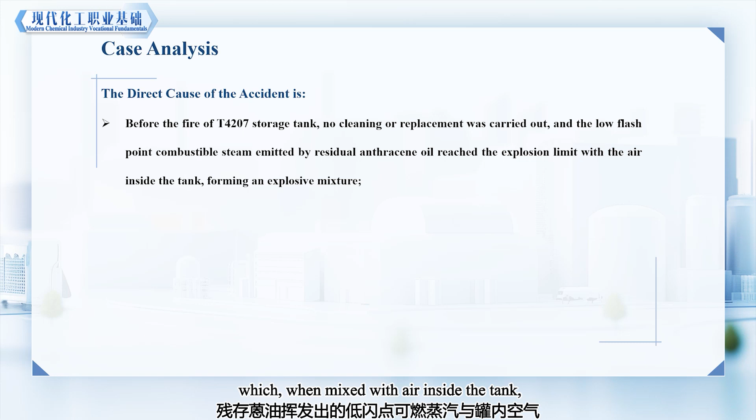The direct cause of the accident, as investigated, was that the storage tank was not cleaned or purged before hot work, and the remaining anthracene oil evaporated into low flash point flammable vapors, which, when mixed with air inside the tank, reached the explosive limit, forming an explosive mixture.

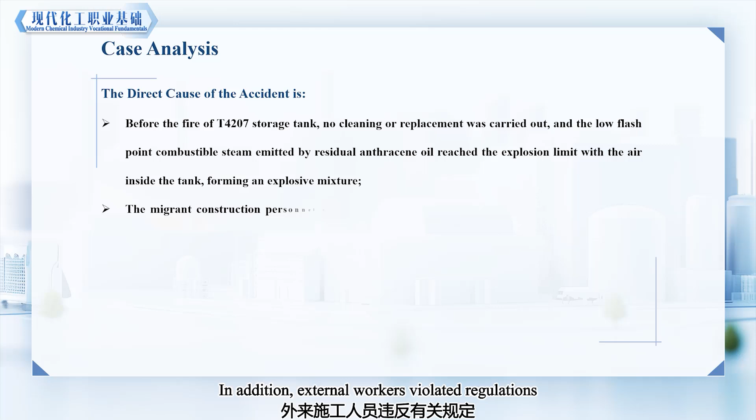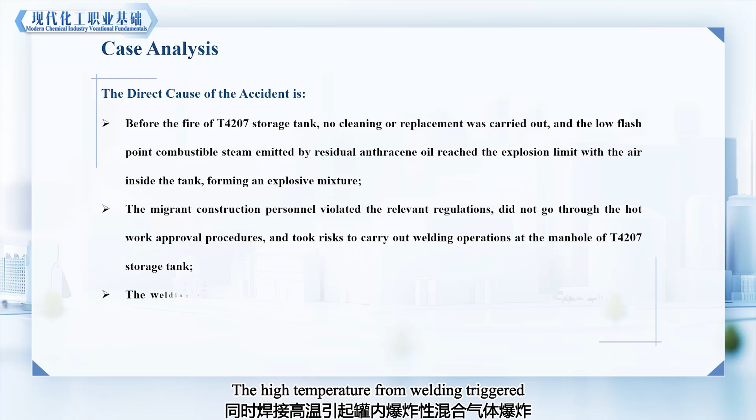In addition, external workers violated regulations by not obtaining approval for hot work operations and recklessly welding on the T4207 storage tank manhole. The high temperature from welding triggered the explosion of explosive gases inside the tank, causing damage to the tank and a fire as the materials inside were released.

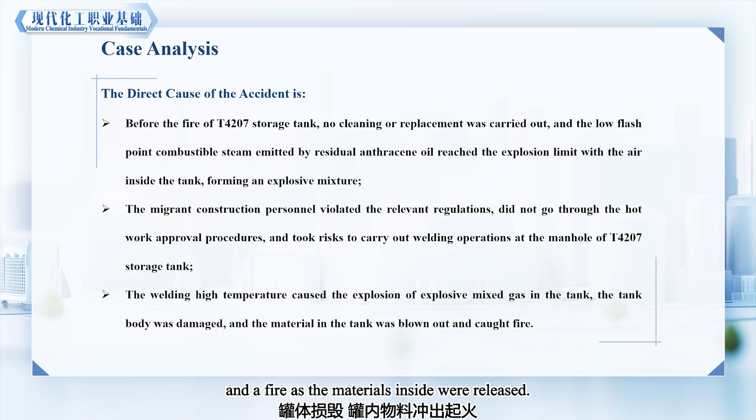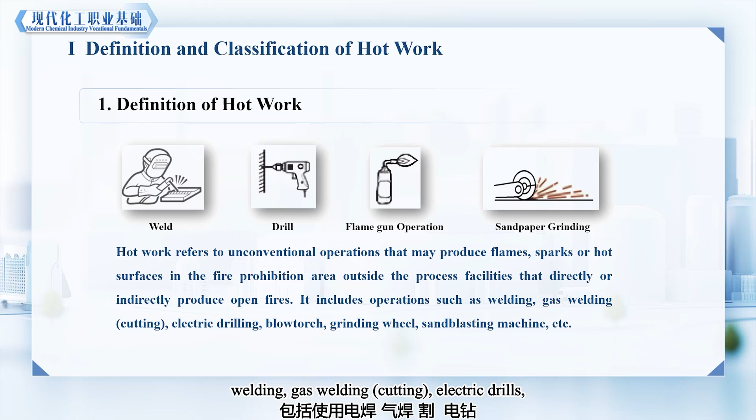What is hot work? What are the safety management requirements for hot work operations? Let's take a look. Hot work refers to unconventional operations that may produce flames, sparks, or hot surfaces in fire-restricted areas, either directly or indirectly generating open flames. These include operations such as welding, gas welding, cutting, electric drills, blowtorches, grinders, sandblasters, and more.

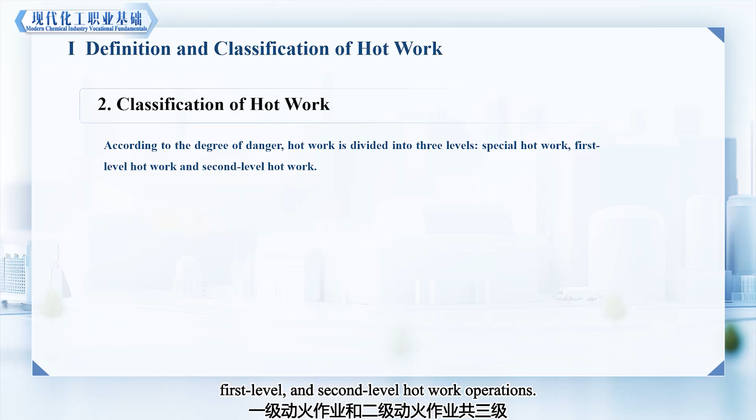According to the degree of danger, hot work operations are divided into 3 levels: special level, first level, and second level hot work operations. Special level hot work is mainly carried out on production equipment, pipeline, storage tanks, containers, etc. in fire and explosion hazard areas that are in operation, including hot work under pressure, without displacement, and hot work

in firebreak areas in significant hazardous source tank areas containing flammable and explosive materials. First level hot work: hot work operations conducted in fire and explosion hazard areas, excluding special level hot work, and hot work in pipeline corridors is managed as first level hot work.

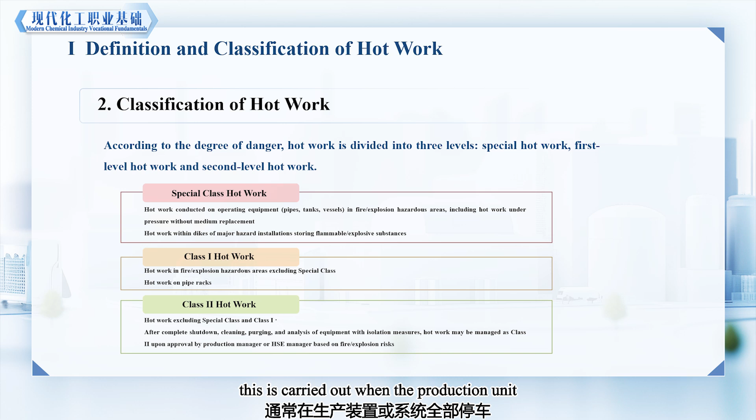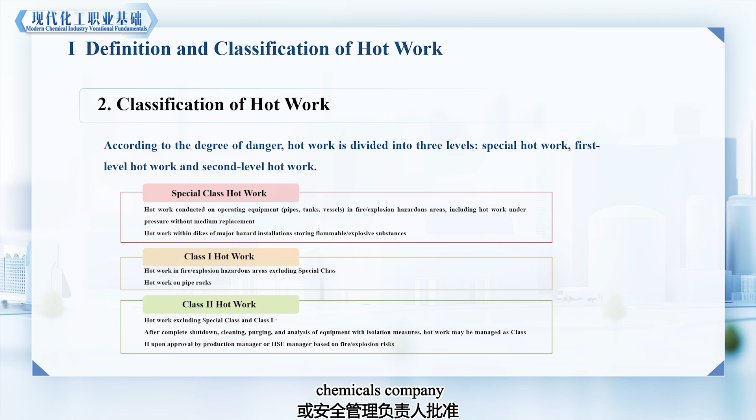Second level hot work operations are those other than special level and first level hot work, typically carried out when the production unit or system is completely shut down and after the unit has been cleaned, purged, analyzed, and meets safety isolation measures. Depending on the fire and explosion risk, it can be approved by the production or safety manager of the hazardous chemicals company.

For second level hot work management, the safety management of hot work operations is very important because without strict management and control, these operations can easily lead to fires, explosions, and other accidents posing a serious threat to personnel and property. What are the safety requirements for hot work operations?

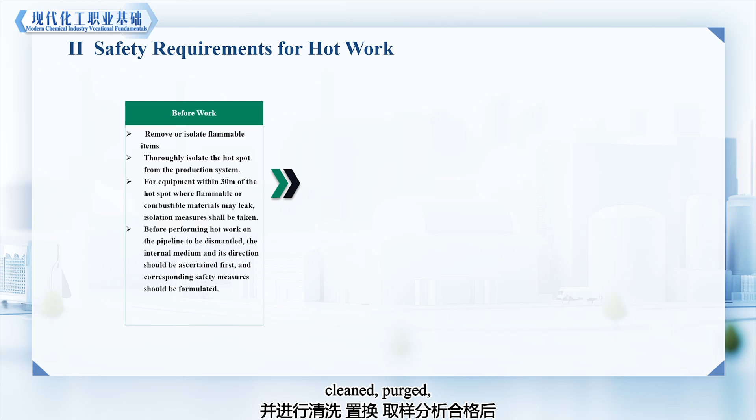Before the operation, before carrying out hot work, all flammable materials around the hot work site must be removed or isolated. For operations involving equipment or pipelines that have contained hazardous chemicals, they should be completely isolated from the production system, cleaned, purged, and sampled for analysis before hot work can proceed.

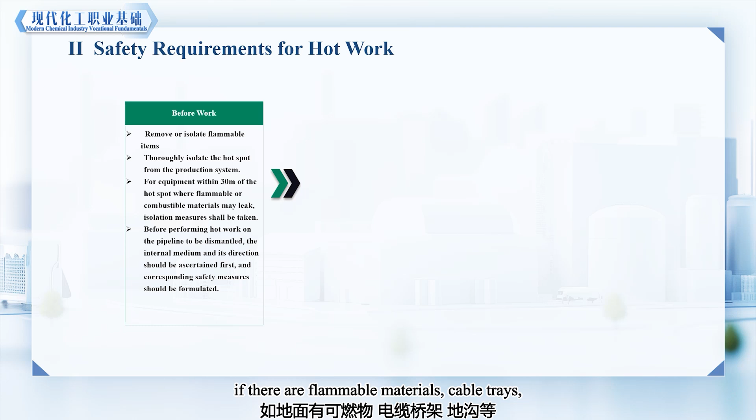For hot work in explosive hazard areas, if there are flammable materials, cable trays, trenches, etc. on the ground, cleaning or sealing measures should be taken. If there are devices within 30 meters of the hot work site that could leak flammable or combustible materials, isolation measures should be taken.

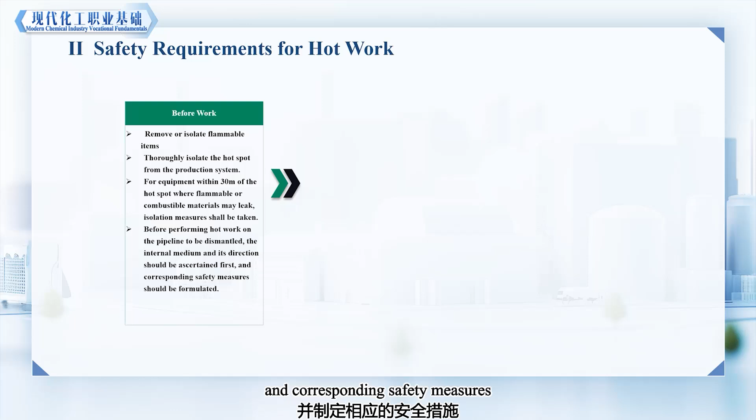For hot work involving pipeline removal, the internal medium and direction should be determined first, and corresponding safety measures should be established. A dedicated person should be assigned to monitor the work. Adequate and suitable firefighting equipment should be provided.

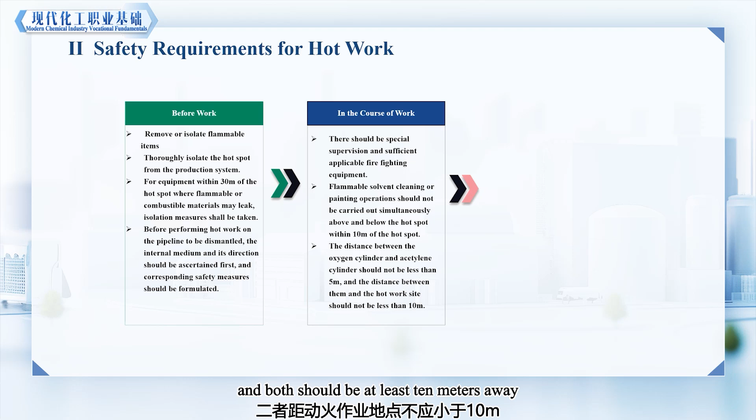No cleaning with flammable solvents or spray painting should be carried out within 10 meters of the hot work site, and there should be no cleaning of combustible dust. Within the 10-meter range of the hot work site, the distance between oxygen and acetylene cylinders should not be less than 5 meters, and both should be at least 10 meters away from the hot work site.

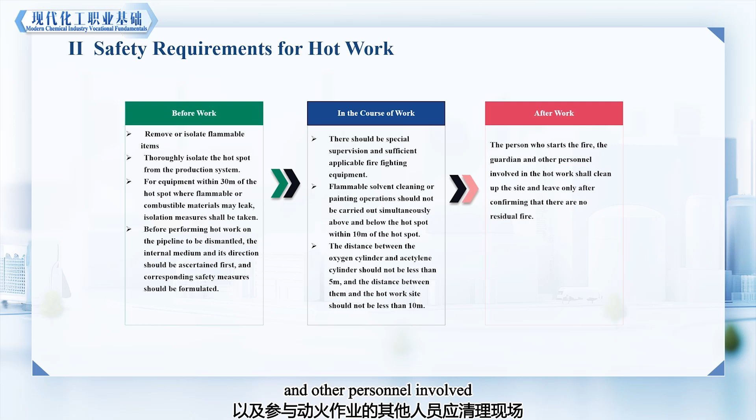After the work, the person performing the hot work, the monitor, and other personnel involved should clear the site and ensure there are no remaining sparks before leaving.

For special level hot work, the operation plan should be pre-designated, and safety fire prevention, explosion protection, and emergency measures should be implemented. When performing special level hot work on equipment or pipelines, the equipment or pipeline should maintain a slight positive pressure.

Hot work should not be carried out on pipelines and equipment that contain thermally decomposing, explosive, or self-explosive materials. Hot work under pressure without displacement should not be performed when the production unit is operating unstably.

Hot work is a complex process involving multiple steps and personnel. The 5 key roles involved are: the hot work operation leader, who is responsible for processing the work permit and bears overall responsibility for the safety of the hot work. The person performing the hot work must confirm the implementation of safety measures item by item, carry the work permit, and perform the hot work.

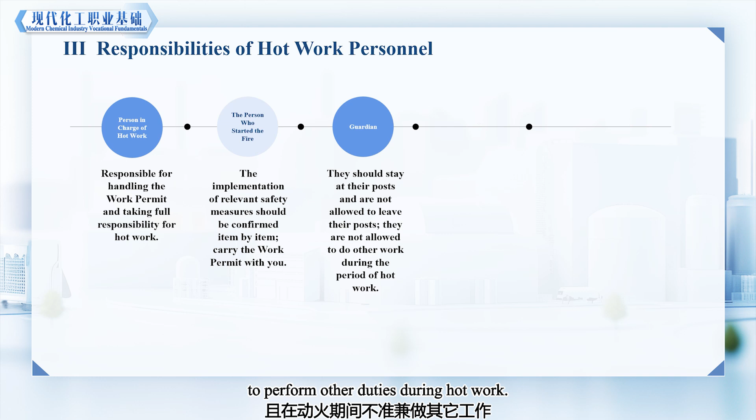The monitor should remain at their post and not leave the site. They are not allowed to perform other duties during hot work. They are responsible for monitoring the safety of the hot work.

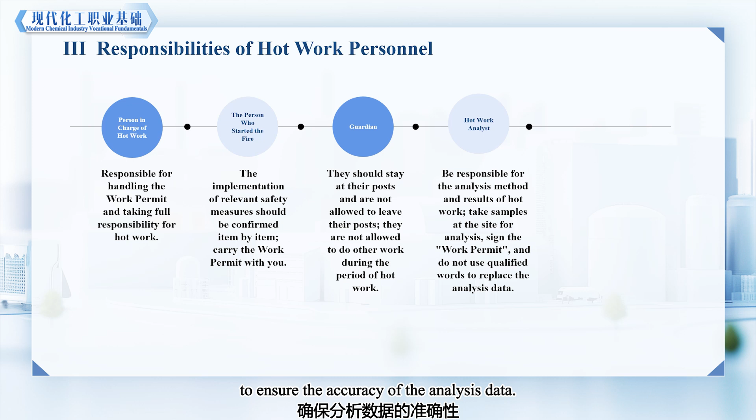The hot work analyst is responsible for the hot work analysis methods and results, conducting sampling analysis on site, and signing the work permit to ensure the accuracy of the analysis data. The hot work approver needs to go to the site to confirm whether the safety measures have been properly implemented and approve the work permit.

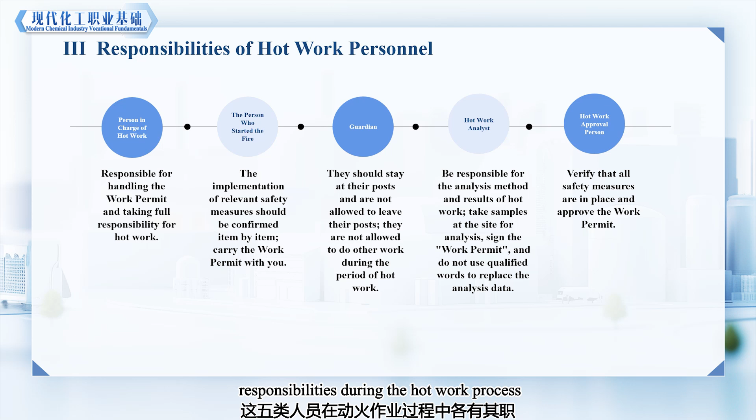These 5 roles have specific responsibilities during the hot work process and work together to ensure the safety of the operation. A hot work permit must be applied for before the operation.

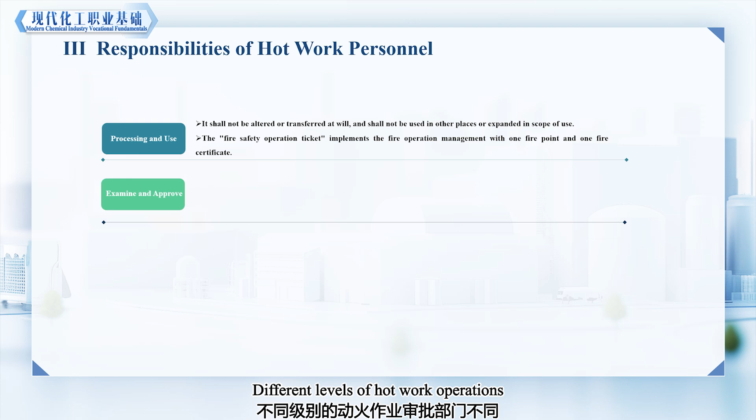The hot work permit should not be arbitrarily altered or transferred. It should not be used in other locations or for extended work areas. A 1 permit per hot work site policy should be implemented. Different levels of hot work operations are approved by different departments.

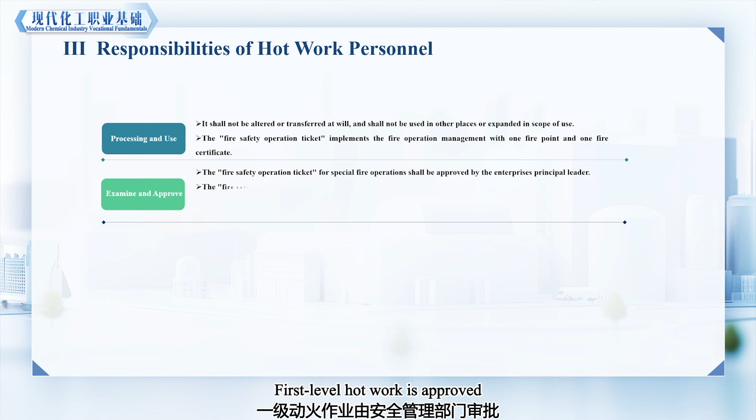Special level hot work is approved by the enterprise's senior management. First level hot work is approved by the safety management department. Second level hot work is approved by the relevant basic unit, such as the production workshop.

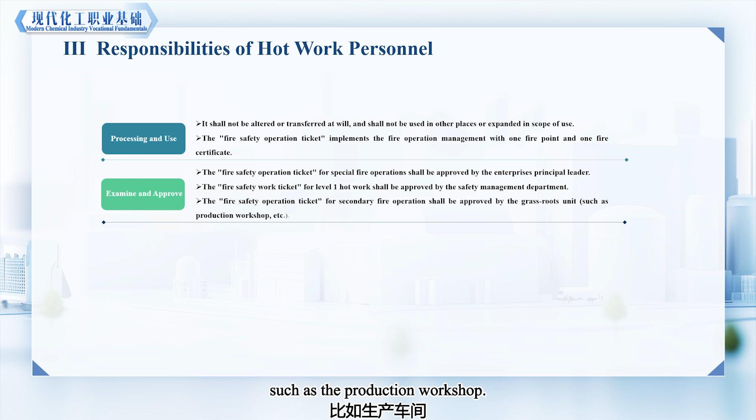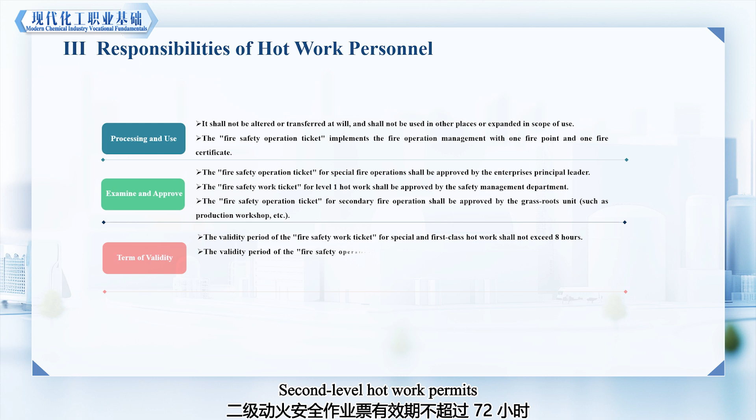Special level and first level hot work permits are valid for no more than 8 hours. Second level hot work permits are valid for no more than 72 hours. If the hot work exceeds the validity period, a new permit must be processed.

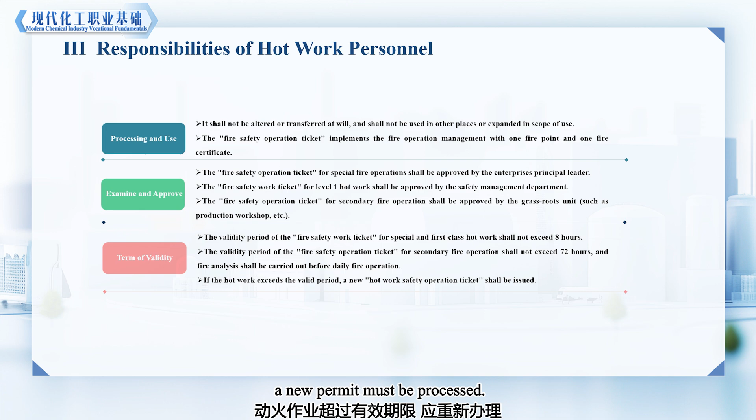Next, let's learn about the definition, dangers, safety measures, and general procedures of hot work through the video.

Stop, that's too dangerous. You're doing hot work here, and there's flammable material in the pipeline. If you ignite it, it could cause a fire or even an explosion. Then what should I do?

First, what is hot work? It refers to unconventional operations outside process facilities that directly or indirectly generate open flames. For example, operations such as gas welding, electric welding, blowtorches, electric drills, grinders, etc., which may generate flames, sparks, or hot surfaces.

Second, the risks of hot work. Since hot work often occurs in places containing flammable and explosive materials, it carries significant risks, especially in chemical plants. It requires careful attention to ensure strict adherence to safety protocols.

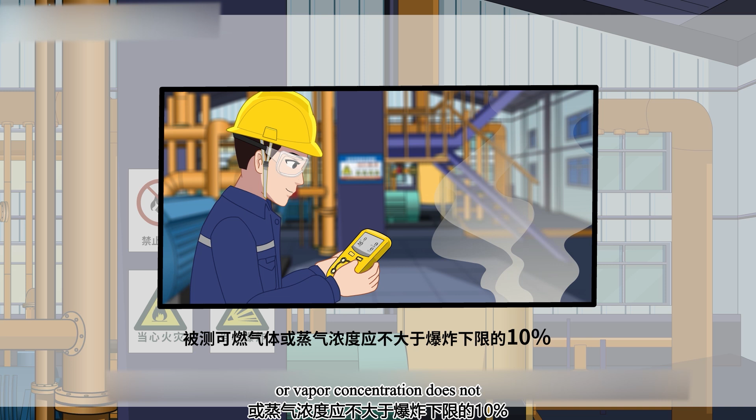Third, safety measures for hot work. Remove flammable materials. Isolate the area. Conduct hot work analysis. Ensure the analysis is satisfactory and make sure the measured combustible gas or vapor concentration does not exceed 10% of the lower explosive limit.

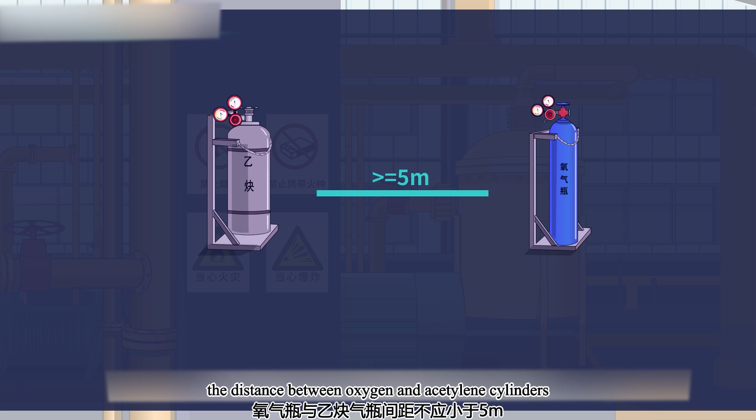A dedicated supervisor should monitor the work, and firefighting equipment should be provided. During gas welding or cutting, the distance between oxygen and acetylene cylinders should not be less than 5 meters, and both should be at least 10 meters from the hot work point. After the work, the hot worker and the supervisor should clear the site, ensuring no remaining sparks before leaving.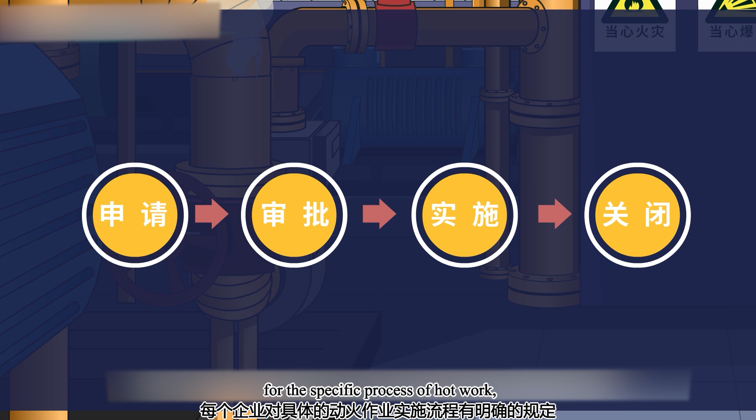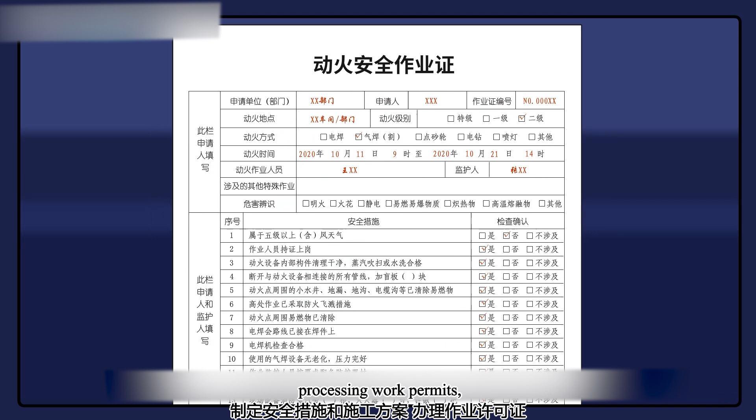Fourth, general procedures for hot work. Generally, hot work includes several steps: application, approval, implementation, and closure, each with its own tasks. Each company has clear regulations for the specific process of hot work, including conducting JSA, Job Safety Analysis, developing safety measures and work plans, processing work permit, confirming safety measures, approving the work, executing the work, performing a completion inspection, and restoring the site.

In this lesson, we mainly studied the related knowledge of hot work operations. Hot work refers to unconventional operations that directly or indirectly produce open flames. It is classified into special level, first level, and second level hot work to ensure safety.

Hot work operations must meet strict safety requirements, such as clearing the site, isolating energy sources, and equipping firefighting equipment. At the same time, managing hot work permits is crucial. They must be strictly approved, publicly displayed, and reported for site clearance after the work is completed.